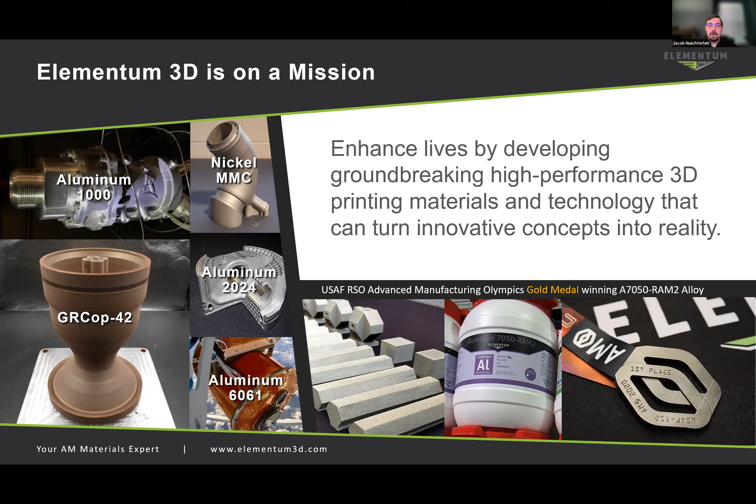Since then, we've released quite a few new materials, materials that people told us were not possible, everything from high strength aluminums to copper alloys, which we'll get to dive into today. We're located in Erie, Colorado, just north of Denver. We're actually going to be consolidating and moving to a new facility soon, so that's exciting as well. But yeah, just to set the stage, we have printers in-house, but our real business is supplying new materials and new print settings to be able to print materials better. Just so we're setting up the context here.

There's a number of different alloys that we've been printing, so we're not just printing copper alloys, but I really want to focus in on what makes copper difficult, why, and what makes copper different from some of the other materials. But certainly there are challenges in other materials that I think are completely different. So the solidification structure differences that are in aluminum alloys or nickel super alloys don't really occur in the copper alloys. And that would initially make you think, well, copper then is a good choice. But really it comes down to materials that are hard to weld typically are hard to print. And so making materials more weldable is a pretty important part of making them printable.

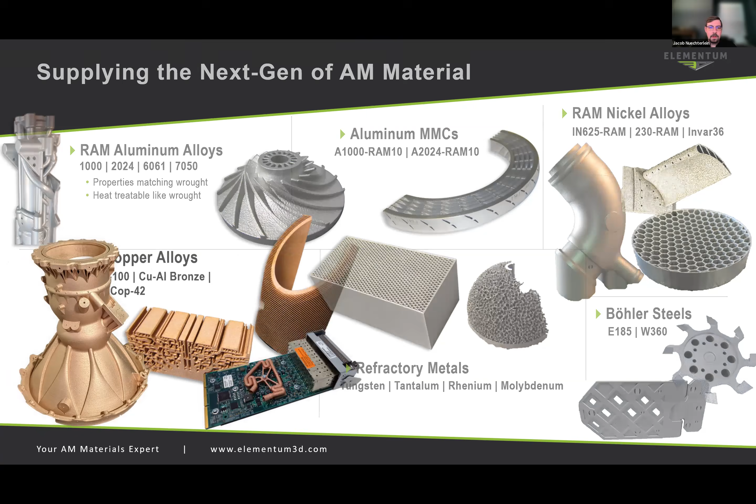So really moving to the copper alloys in particular, we started printing copper alloys in late 2015. And there's a lot of difficulties that come with that. There were a lot of questions. There were a lot of people that said it's not possible. But to start, there just wasn't any material available. The powder wasn't available. So finding the correct powder and being able to supply powder that would flow and spread in the systems properly was the first difficult task. And including some of these alloys like the copper aluminum bronze, we started with essentially mixing multiple different master alloys to be able to make that material when we were doing our first study on it.

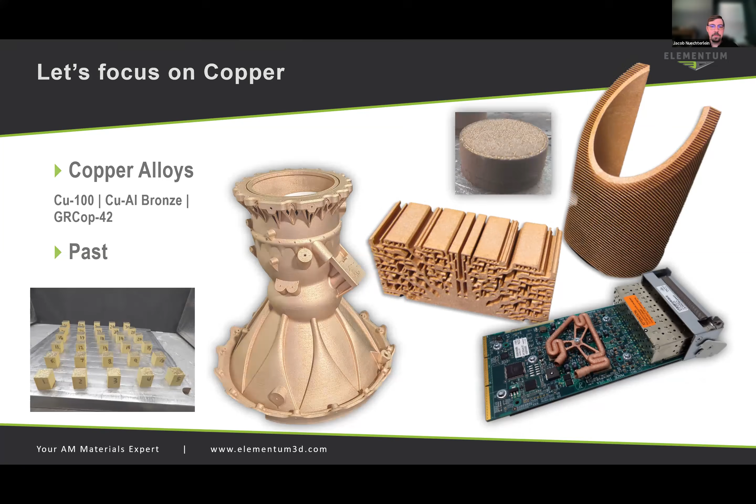And then from there, the conventional wisdom in the industry was, well, you can't print copper unless you have something like a green laser or something extra because of the reflectivity issues. So copper in general does not want to absorb laser power and laser energy. One of the advantages we found, though, was aluminum doesn't really either. Now, the advantage of aluminum is its lower melting temperature, but there's still that same problem of they both would like to reflect these particular wavelengths of energy. And therefore, the conventional wisdom was you had to go to green lasers to get this to work. That's really where we came in and said, well, hold on, that's not exactly true.

Because it's a powder, when the laser interacts with the material, even if it reflects, it has multiple chances to absorb because it can reflect off the individual particles of the copper, which then allows us to melt the material, but you have to move the laser very, very slowly. So then it was uneconomical.

So we ran into some issues right away with it being uneconomical to print, it leaving high porosity, and being able to get to like 94, 95% dense with a print. And that just wasn't far enough.

So that's when we really started diving into, as it says here, we found a process in which we could produce the copper material with a coating on the powder itself. So we could actually start printing pure copper material with that coating that enhanced the absorptivity. So all of a sudden we could get to very high densities.

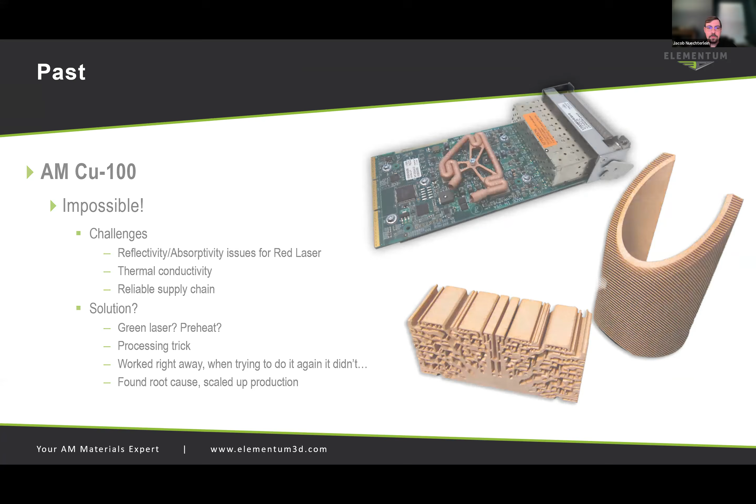Then we started getting into some conversations, and I think other presenters today will get further into this, but we really started printing with GRCop-42, which is a NASA-developed alloy, and started to look at that for high temperature applications. We started working on that primarily with how do we process it? What are the printer settings? How do you go about making this material and printing with it? Because of our experience in the copper 100 and in other copper alloys that we had begun working on.

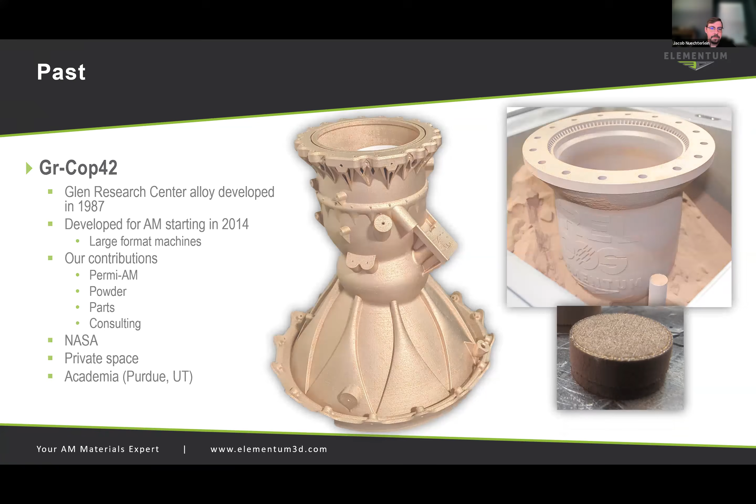But again, a lot of this work has been done for a long time now. As it says here, starting to print in 2014. So we started looking at, well, what are some of the things that are going to really limit the usefulness of being able to print these things? And there's some components within these rocket engines that we identified as places where you don't want to have to take two parts and bolt them together or weld them together. You'd like to be able to print it all as one piece.

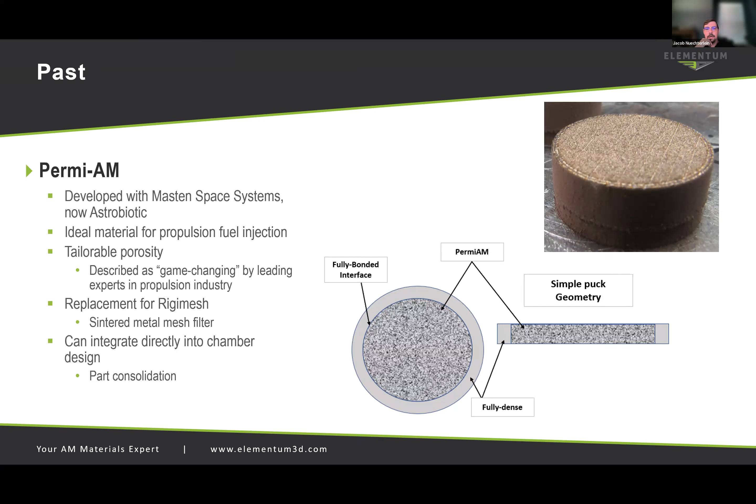And so one of those is a product that we began developing with Masten Space Systems called Permi-AM. This is essentially a process in which we can print it all as one piece, but have different functionality within the part. So we can have a single component all printed at the same time, but have a certain area that is intentionally porous in a particular way that helps us regulate flow of gases and fluids. And we've really gotten to dive into that more on recent projects as well.

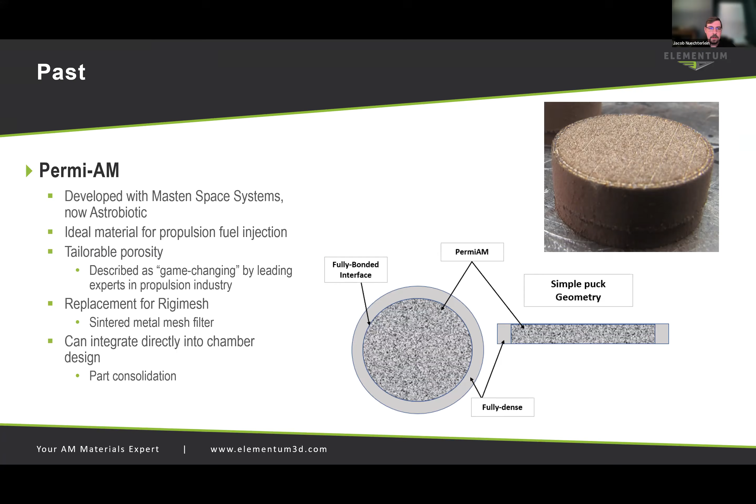Then there's other materials. So aluminum bronze is almost 90% copper, 10% aluminum. But the real advantage here is, well, we first started looking at it actually because of its color. It's used often in things like fake jewelry, that sort of thing. And so the color was actually something that we were first approached on by customers, where they were looking for something that had that kind of gold color to it.

But ultimately, the real applications for it end up being in high corrosion places. And so we've started to find a number of naval applications where we really got to dive into this. But like I said, one of the biggest challenges with this material was really being able to source that particular alloy, because you have to source the material from somewhere. And if it's the first time it's ever printed, finding someone who's going to do a custom run of a particular alloy is not something that's easy to do.

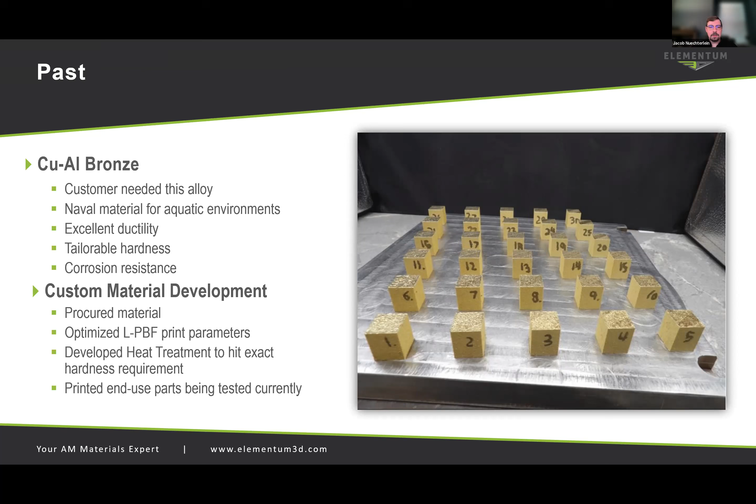As it grows and once it gets into production, that certainly becomes simpler and more straightforward. But I think that takes a while before a particular material is in full production and therefore is readily available and less expensive.

So now I'll move on a little bit more to the present. What's going on today? Where are we really going after different applications? We found a number of different, I think, exciting applications in the semiconductor world, from cooling to heat exchangers in data centers. But some of the things that I didn't realize were really going to be applications that are really starting to take off with our copper, now that copper is a more commonly printed material. We're starting to see RF antennas.

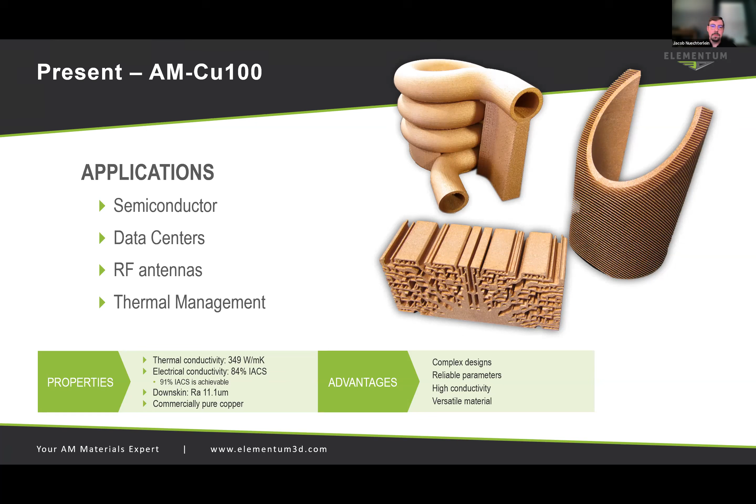And then certainly rocket propulsion. So we're working with different groups like the University of Texas. There have been competitions within student groups for looking at the next generation of rocket engines. Certainly, we've done some work with NASA and with other commercial partners as well in printing GR-COP 42 and other high temperature coppers, which we'll get into in a second here.

But I think there's a lot going on now where I think a majority of rocket engines will be printed in the future. And I think finding that sort of application within additive has really been the key to the growth of additive over even the last 2 years. Finding applications where it just makes more sense to print it than it does to make it through conventional methods. And I think that's really exciting to see, even accessibility to technology like this, down to the university level, where they can do things that just weren't possible even a couple of years ago.

So within GR-COP, there's a lot of optimization, and I think this goes for all the alloys that we work on. You can print just some simple cubes and say, well, done, it's good to go. That's very different than being able to make complex geometries, shapes, overhangs and thin walls, and being able to do that in multiple different systems. You hear, well, I've printed it in a smaller system like an M290, you should just be able to copy paste and put that into a larger system like an M400, even from the same manufacturer. And it's typically not that simple.

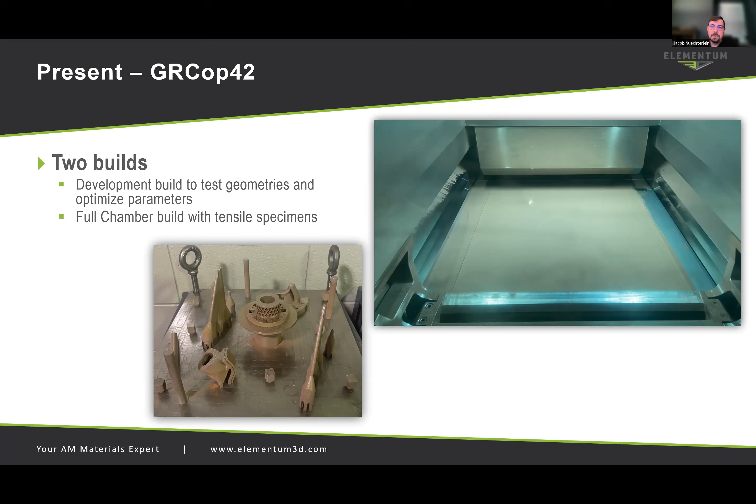So it has a couple of passes here of the laser. You can see you do not need a green laser. This is a standard off-the-shelf system. It can print copper, it can print GR-COP 42. And I think that's an important aspect. There may be advantages to a green laser or something along those lines, but there's also disadvantages, and those green lasers are typically harder to focus down to a very small spot size. And so you get these pluses and minuses within these different materials that I think are important to really dive into.

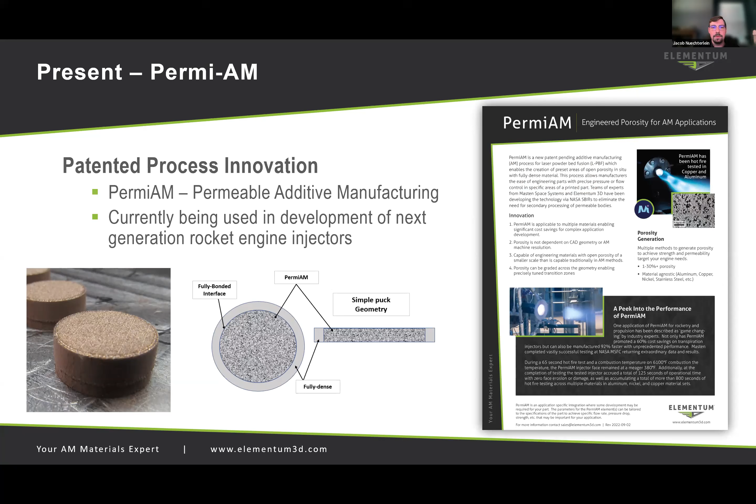I already talked a little bit about Permi-AM and that technology and the different designs, but we've gotten to dive into copper, nickel alloys, all sorts of things for these pretty complex geometries. But I'm actually excited for the future of Permi-AM and where it can go, because it's not just in propulsion, but we're starting to see other industry applications in oil and gas, even combustion engines, where there can be big advantages to something that can control or moderate the flow of gases or fluids.

So there's a couple of things where we can see cost savings of not having to attach two pieces together. We can get turnaround times on prints much faster, and we can do things like swirl the fluid or have the fluid exit at certain speeds or have different pressures applied. So there's some really interesting application space that we're investigating today that hopefully we'll be applying to really interesting applications in the next 3 to 5 years.

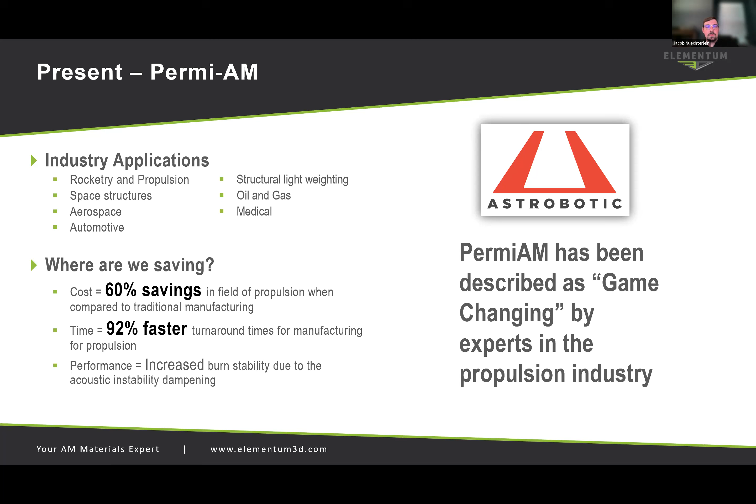What we're doing with GRCOP 42 today, I don't want to go too far into it because there's going to be other people that really get into this, but I want to talk about some of the issues with GRCOP 42, which tend to be in the atomization, supply chain and the cost of that material. It's very difficult to make GRCOP 42. It contains chromium niobium compounds, which have a much higher melting temperature than the copper itself. So you have to go to a very high superheat in the copper, a temperature well above the melting temperature of copper, to melt those precipitates and get a good distribution of those elements so that when you atomize, you have a nice consistent powder. Well, the problem with that is then you start to dissolve the crucible.

And so as you're at these very high superheat temperatures to dissolve those chromium compounds, you end up with that kind of race. Do you dissolve your crucible faster and therefore have contamination from the crucible, or even bigger problems, before you're able to atomize all of the material, which then limits the size that you can do at one time. And there's a lot of great companies doing atomization of these materials, dialing in, getting better, and finding new crucible materials and different ways of doing it. But it is still limited, and the volume of powder that's possible to produce is really limited by technical concerns, not just the commercial concerns of making GRCOP 42.

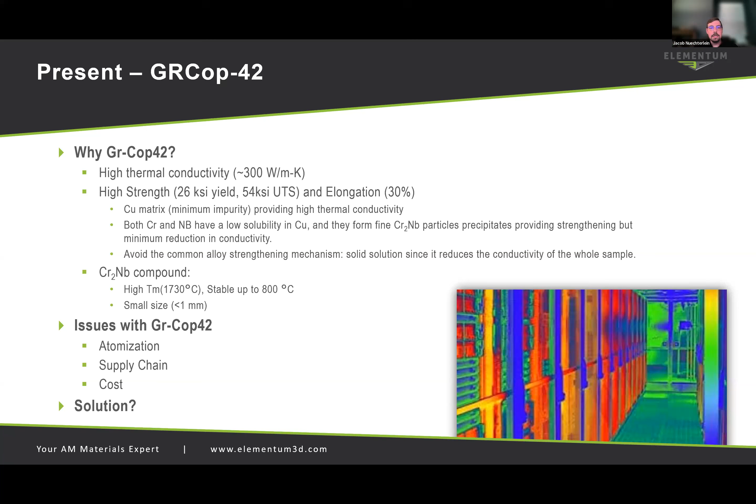And so there's then the supply chain and cost problems that go with that. Two years ago, we bought the majority of the volume that was available to the rest of the industry. As a small company like Elementum, that's a problem. And so we identified that as an issue. GRCOP 42 performs quite well, there's great performance out of that material, but if you can't find it for other application spaces because it's too expensive and hard to come by, and therefore you have to accept lower quality product in some cases, or product outside of a very defined specification because that's all that's available, that causes issues. So what's the solution?

This is really what I want to talk about, the future. I know there's a lot of different people looking at solutions to this, either atomizing GRCOP faster and better and in larger quantities, but also looking at alloys that are similar to GRCOP 42. That's really something that we're working on. It's not released yet. But at the moment, we have some really interesting results with what we're calling our hot copper, a high temperature copper meant to perform as well or better than GRCOP 42 in conductivity and high temperature mechanical performance, but be way easier to produce in large quantities, therefore easier to source and available for applications other than just rocket engines.

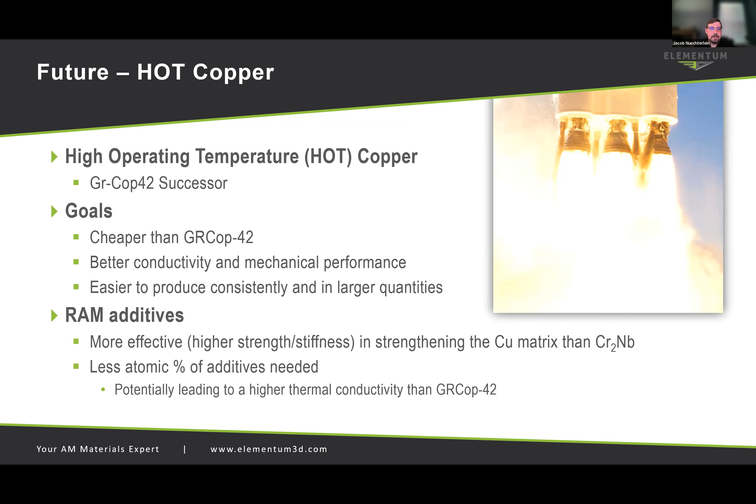The way that we're doing this is through our particular technology called reactive additive manufacturing, which I won't really discuss today. But if you want to know more about what we're doing and where we're going with our hot copper, happy to dive further into the science of what makes this different.

The future of Permi: there's a number of different alloys that we've been applying it to, not just the GRCop-42, but I think there's also different things where we're going to start looking at the flow patterns and how the fluid or the gas is flowing through these pores, and therefore how it comes out on the other end, and then controlling that to do things that just weren't possible without 3D printing. So not only taking advantage of the pressure drop, but taking advantage of some of the other advantages to this kind of intentional porosity that we're printing in.

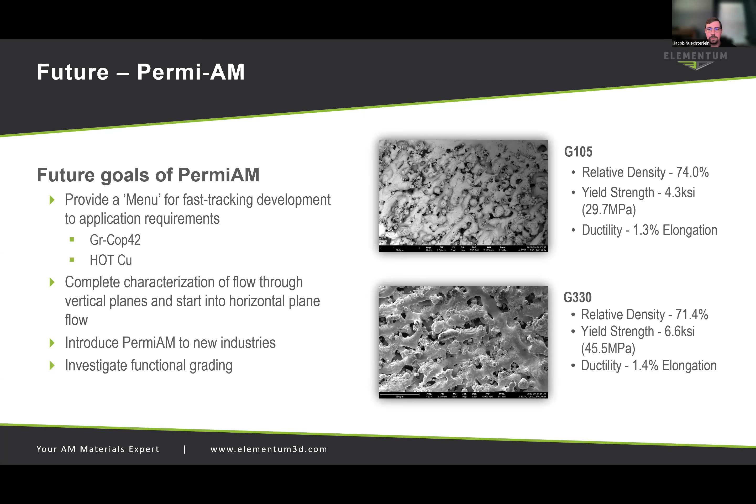And then we recently were awarded an SBIR to go after copper nickel alloys. We've been looking at this over the past year, really looking at copper nickel alloys for RF components and for other components within the naval space, which I think there's some interesting reasons for going after some of these copper alloys that just weren't really achievable in the past.

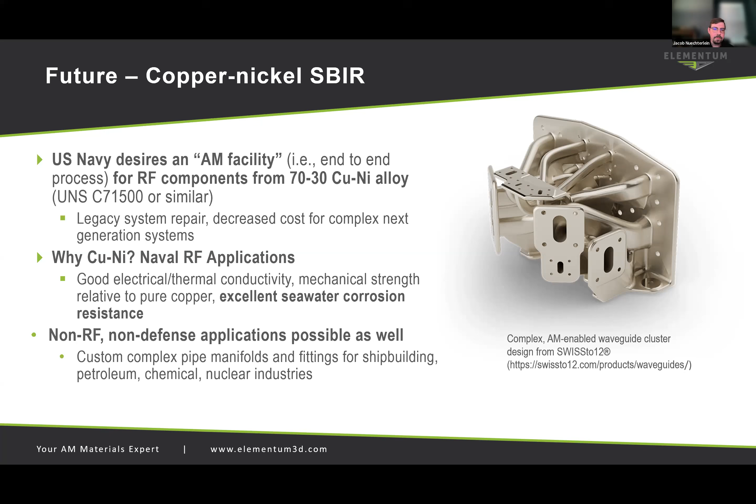So like I say, there's a number of things that we're working on in the copper space. There's a number of other alloys that we're looking at, maybe in the future, of very high thermal conductivity coppers. So going to copper alloys that have higher thermal conductivity than the wrought material, and then looking at how that affects the landscape and the applicability of additive for a number of applications that were just kind of locked out in the past.

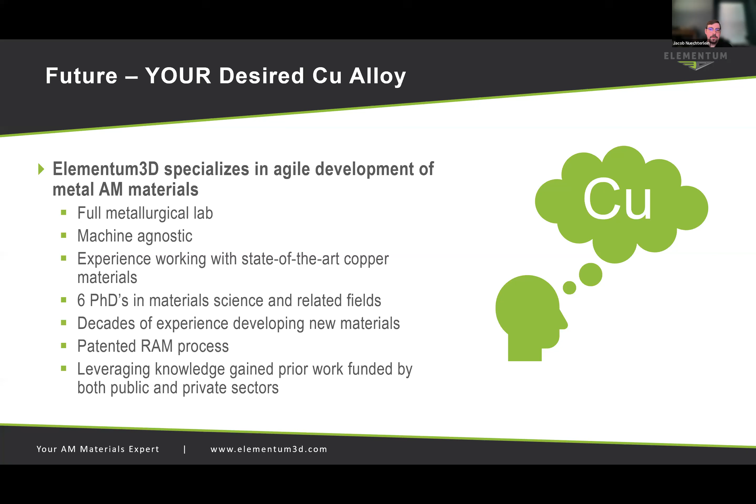So at Elementum, that's really what we focus on: developing new materials, developing new alloys, and copper has been one of the things that we've been leaders in for a long time now. So that's us. That's what we do. Happy to maybe have a look at the Q&A and dive in.

Hey, so yeah, awesome presentation, Jacob. This is a great collection of speakers because we're all going to probably take a slightly different angle on the subject. And my angle is definitely going to be trying to raise awareness of the vast amount of applications and what we're doing at 3D Systems. We have numerous different copper alloys, and I wanted to show you a sizzle reel of really great applications we've been working on. So let's go ahead and kick it off.

I'm Scott Green from 3D Systems, principal solution leader here. If you're not aware of 3D Systems, we're a global company. Most of our metal printing and R&D in metal is happening between Littleton, Colorado, Riom, France, and Leuven, Belgium. But we have offices all over focused on R&D of some sort, both plastics and metals. This is how we're organized. We're basically broken in half: on one side is healthcare, and on the other side is industrial solutions, half by revenue, and I manage a bunch of different segments, including semiconductor, part of energy, and academic and research.

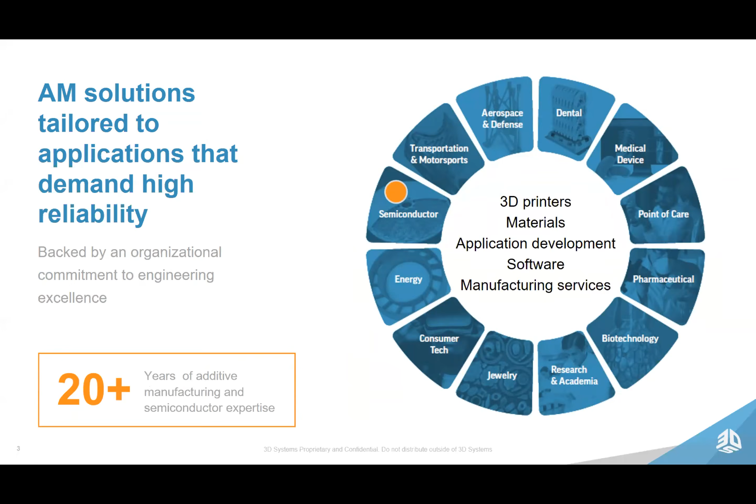Generally, how we work is we take a kind of holistic approach to working with our customer and bring solutions together with innovation and expertise. I think there's actually a really good way to capture this, which is what we call our tech transfer process. For any application we usually go through this 5 or 6 stage process where we take a look at your challenge, we try to figure out the right solution for it. And we go through an innovation process, a development process where we help do design for additive manufacturing.

We do industrial design and design for manufacturing in general, which can include lightweighting, advanced cooling design. We've got a huge amount of expertise in cooling design, thermal design. And then once we go through that innovation process, we're going to go through the process of figuring out how you are actually going to make this thing. And we find the right machine, material, build styles, any downstream post processors through our network, anybody who needs to do surface treatment or machining.

We start to build this package of knowledge on how to make something. And that is very valuable because we're de-risking the entire process of using additive. And that's pretty key to scaling additive in industry. It's still kind of new for a lot of people. It is scaling really quickly in industry in general, but a lot of companies are kind of dipping their toe in, but there's still risk.

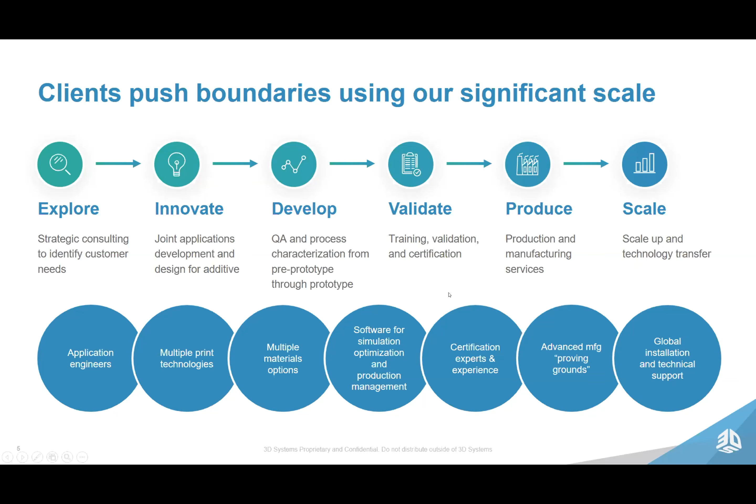Just a little bit about us again. We work in highly regulated environments. Half of our revenue comes from healthcare, medical device production, and healthcare in general. So we've got now almost 200 machines running nonstop, 24/7, 365 internationally. And we specialize, I like to say, in torque as opposed to speed. We run a little bit of everything that we have, and we try to be experienced in all the different processes of post-processing and finishing and all of our different materials so that we can be most agile to help customer needs.

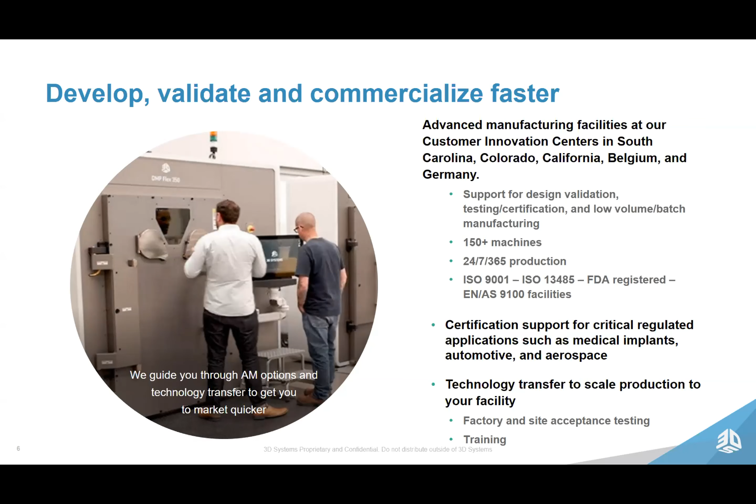All right, so let's talk about copper, what we're here to talk about today. Now, generally, I just took a sampling of the past few years. As a machine maker, 3D Systems, a machine designer and vendor, and a user of our own machines, we're always getting the biggest breadth of requests from people. Okay, do you use niobium? Do you print unobtainium? Right, all these different things.

And we've always gotten some requests for copper, but I will say that it's definitely rapidly increased in the last few years. It was kind of quiet for a while, a couple requests every quarter here and there, but it's actually rapidly increased. So there's definitely an acceleration in not only the implementation of additive in industry, but also copper applications in industry, and that's enabled by folks like Jacob and 3D Systems and other material manufacturers or vendors that are configuring copper to make it easier in the process and finding novel alloys which are bringing the most valuable parts of the element together with other very valuable properties to bring a valuable part to market.

So here you can see some basic industry ranges. Okay, we've seen it all across the board. Space access, space payload, marine, defense, semicon, of course. Very infrequently, you're going to find copper in semiconductor capital equipment, but more frequently, you're going to find it in general thermal applications not related to semicon process. Definitely general aero, auto, and consumer electronics.

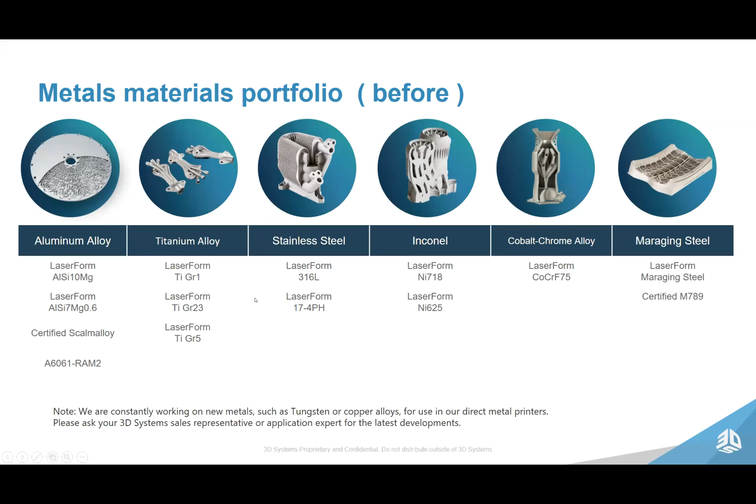Now, this is what our metals portfolio was before we started to really focus on copper. So, we use 6061 from Jacob and Elementum 3D. It's great. But then again, we also have all these other materials available. So what we did is, in 3D Systems style, we laser focused on the concept and just crushed it. We went across the board and figured out, okay, out of all possible alloys that are being requested, which ones are critical, and each one of these has different values and different reasons for being developed, and most are at very high TRL levels at this point.

So here you can see we've got, I believe we're at 99.8% pure copper, copper nickel 30. This was developed with the United States government for marine applications through Newport News Shipyard. It's something we announced about a year and a half ago and finally released at IMTS. So we're printing and firing on copper nickel 30 today. Copper chromium 2.4, copper chromium zirconium, both very similar alloys, which share parameters, and GRCop-42.

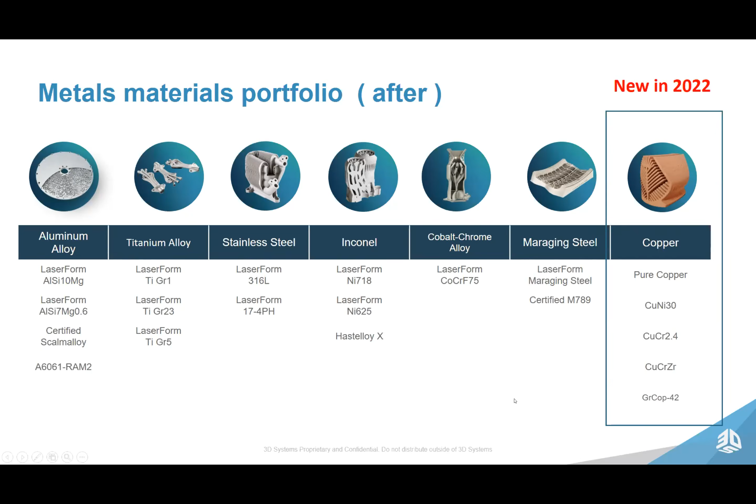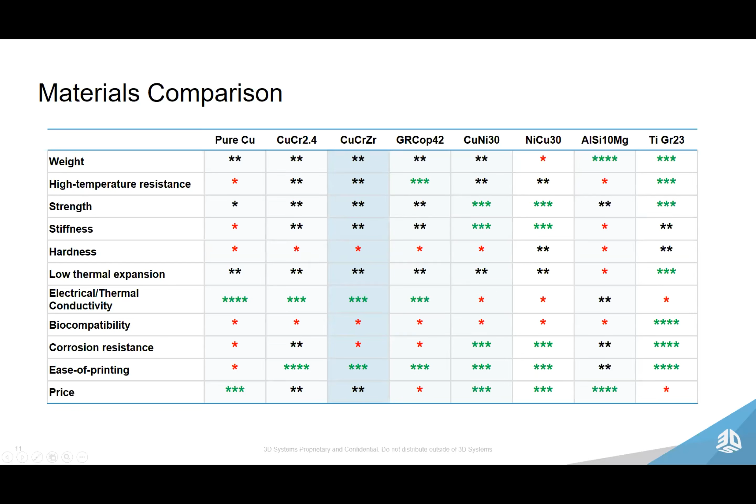All right, now these alloys are printable on our mid-frame system, not yet available on our large frame system, DMP Flex 350 and Factory 350. Pure copper is in fact using a different optical configuration, and there's a good reason for that. As Jacob mentioned, there are ways to print it with a standard optical configuration, and we did prove that too. But in order to really get the productivity and speed for production applications that our customers are demanding, we did go with a different optical config, and that actually benefits us in the end result.

Yeah, so if you're not familiar, DMP 350 and Factory 350 today are at 275 by 275 by 420 in height. And we pull a vacuum and then backfill with argon. So operating in almost a zero oxygen environment is great for oxidization and protecting and maintaining the quality of the material. It also allows us to achieve extremely good IACS results through our optical strategy as well as our chamber.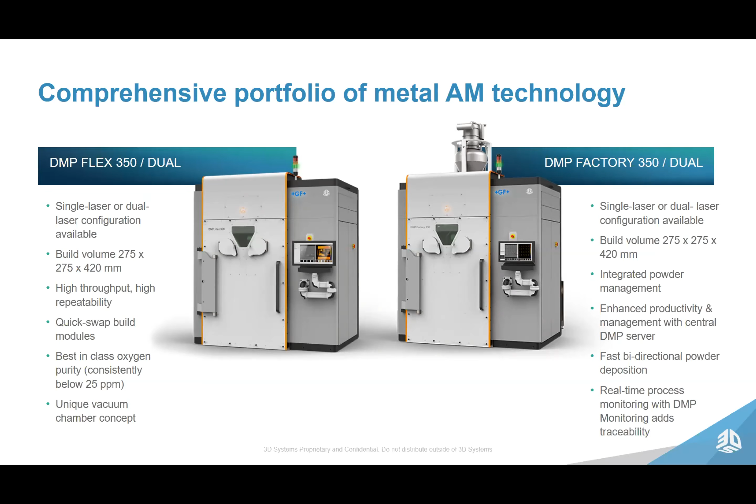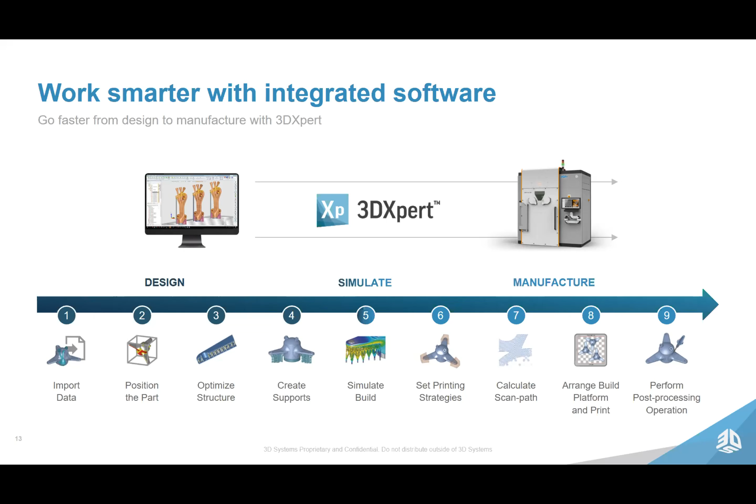All of this is driven by our 3DXpert software, which is an all-in-one solution for additive manufacturing. It allows us to design supports in any way you'd like, but we offer styles for the materials that we support. So it's pretty simple and easy. Also, you can engineer your own type of porosity on the surface or interior with the functional representation and implicit modeling. So it's a truly hybrid modeling software, which allows you to bring any geometry together into a single package for printing. So any part could actually include lattice, mesh, implicit, and B-rep CAD, and supports all at once. Let's look at some application examples.

Yeah, so commercially pure copper, we're absolutely seeing things like cooling tubes, and in this case, we printed on the Flex 200 fine spot configuration, 50 micron layer thickness. Yeah, and this is commercially pure copper. This was shown at IMTS, and we'll be showing again at Formnext. And it's a little cross section through a cooling tube with a heat sink inside.

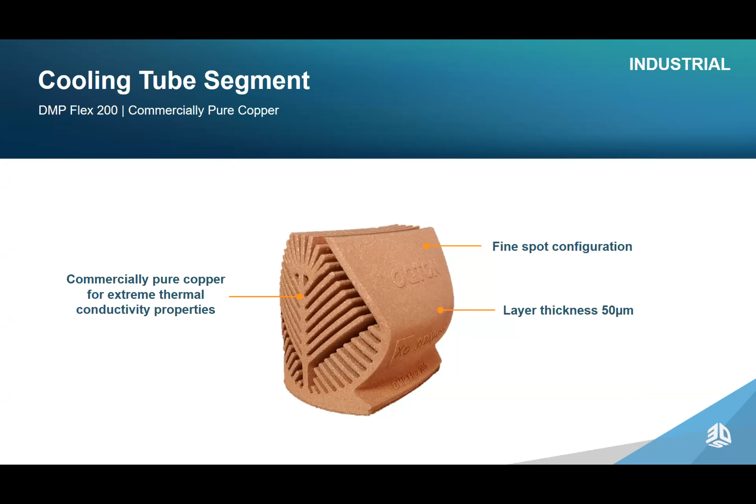And one other thing is we do offer a smaller volume. I'd say that our Flex 350 and our Factory 350 are our bread and butter mid-frame systems. We also offer the DMP Flex 200, which is a slightly smaller system with a really fine spot size. So we're able to not only cover the high-speed production copper applications where general layer thicknesses satisfy the need, but also we worked very hard to do super thin wall thickness, 150 micron and lower wall thickness. But that's only available on our Flex 200 because of the special optical configuration, right?

It's got a smaller spot size. We use a compressive roller, and we can do thinner layers with thinner, smaller powder. So we're really able to cover the different kinds of applications and needs, fine features, high precision, and in one range, a mass amount of different materials available in our mid-frame workhorse.

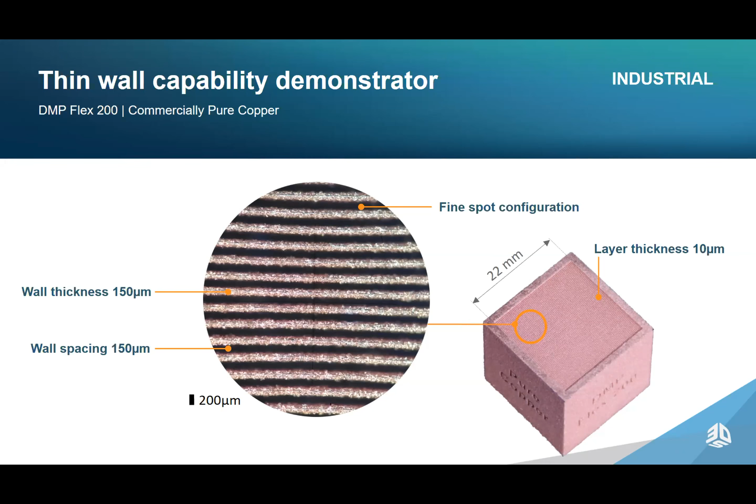That's one issue that you're going to see in the market: many other companies in the industry are going to say, yeah, you can get up to 100% IACS with heat treating, because one of the tricks that you'll see is, yeah, you can print copper, but it's porous as heck. So you have to go through a heat treat to kind of shrink it down and basically melt it together and solidify it. And that could be okay for your application.

That's not the way we work with 3D Systems. You get parts that are almost completely dense coming out of the printer with 100% IACS, up to 103% IACS we've seen. So no heat treat is required. With heat treat, you just gain marginal advantage on IACS and density. So heat treat on commercially pure copper is not a requirement to get your full density.

It's not like a binder jet powder part where you have to go through a heat treat or a sinter to get to full density. And that's what some LPBF processes do require you to do, is go through that heat treat to achieve final density. So luckily, we figured out a way to do this without that.

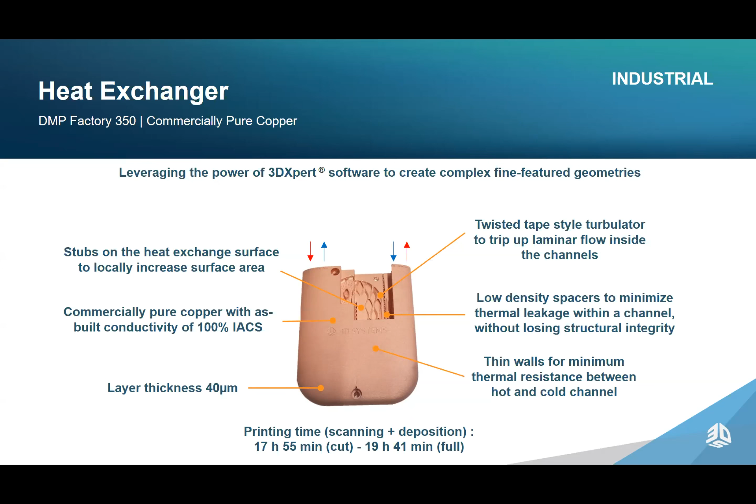Here's a heat sink we actually show quite a bit. We printed it in copper, and you can see fine features, and again, stable conductivity after heat treat at 102% on this guy. And typically we're again about 100% IACS as built.

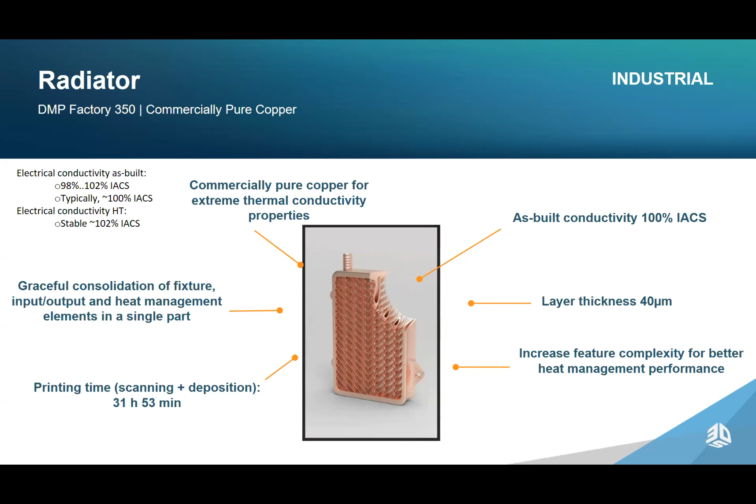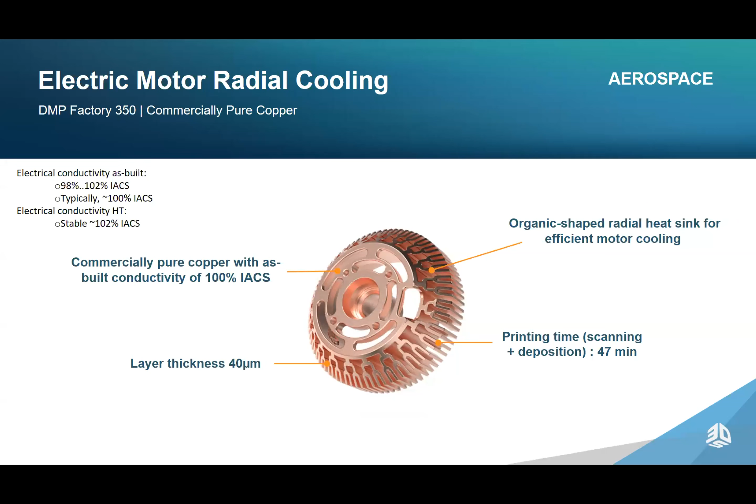And aerospace, here's a good example of an electric motor radial cooling ring. A lot of different applications across many of the industries. Again, these are all based on real customer use cases. I'll give you some time to take a look at these. Electric motor winding, this is a very popular one. So if you're in the inductance space, this is another great example for you guys.

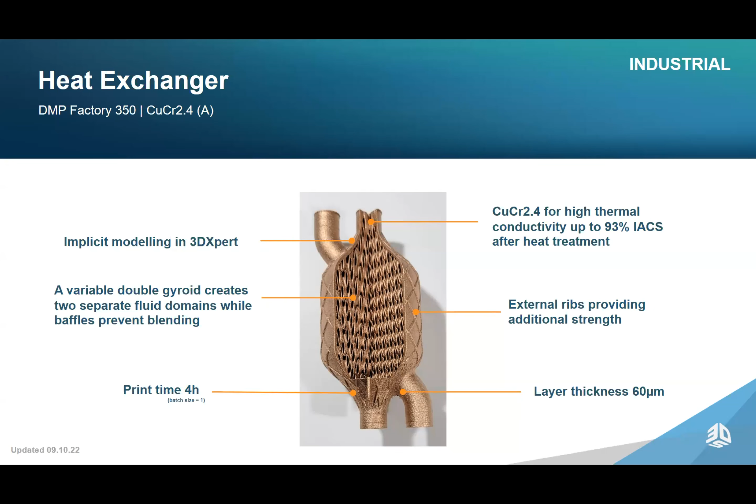And heat sinks, of course, heat exchanger is always a popular topic. Going to be a good application for copper chromium 2.4, copper chromium zirconium. Something a little bit more stable than just pure copper, which is pretty ductile. This was implicit modeled in 3DXpert. For this specific guy, we're up to 93% IACS. Again, it's geometry dependent. And this is printed in 4 hours.

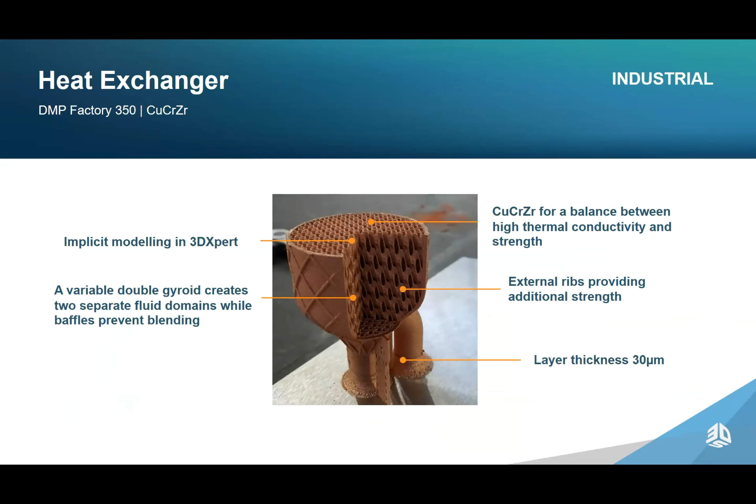I'm going to slide through a couple more of these. Heat sinks. There's a CuCrZr, copper chromium zirconium heat sink. And of course, we have to show a GRCop-42 and 718 combo. In this case, we are able to start and print on top of a flat surface. So if we do print this propulsion component, we're able to actually re-index on top of it and continue printing, or it could be assembly. And this is a test we did of cladding and printing with a multi-material on top of it.

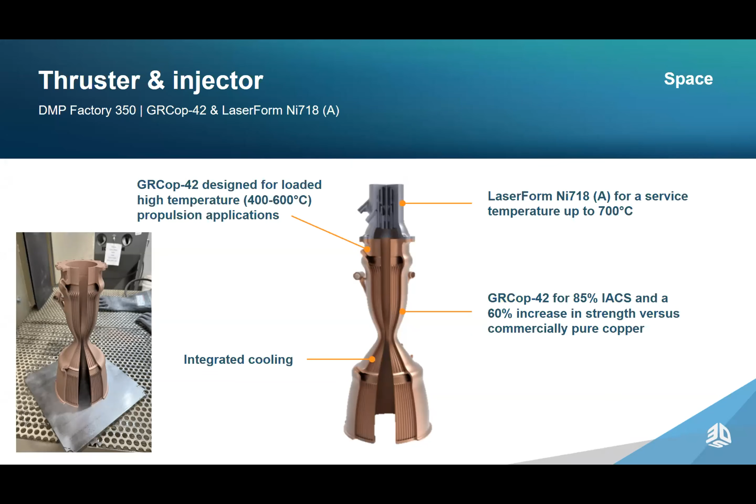So if you would like to know a little bit more information, I'm right on time. You can come to Formnext, and if you're not mobile enough to get to Germany, that's fine. You'll see our reports from Formnext. You'll see our parts live. We are launching a lot of these copper alloys live. Typically, we will start to launch stuff even at mid and higher TRL levels, and then if you come engage with us, we'll finish developing for your specific application. So we'll be talking about at least 5 different copper alloys that we can support at TRL level 5, 6, and 7, and up to 9. So very ready to start printing for customers.

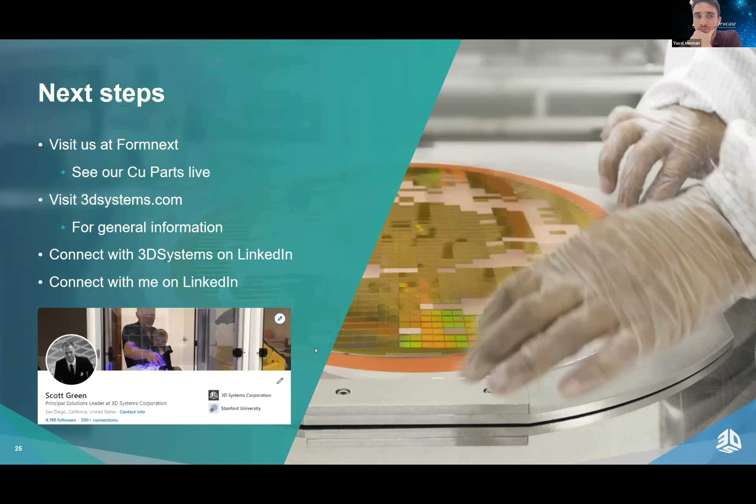It does not look like I can. Are you able to? Oh, here you go. Now, got it. Okay, I got you. So give me 1 sec. I'll just pull it up. Sure, quite all right. Okay. Perfect. I can see it.

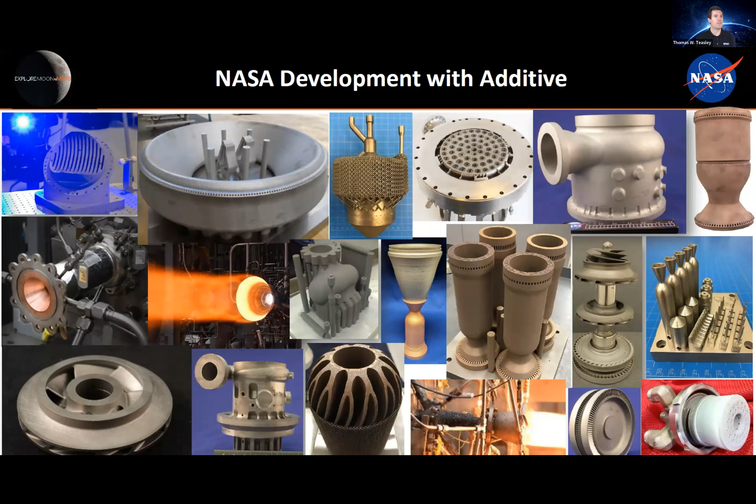You can see several examples of GRCop-42 and GRCop-84 combustion chambers shown here, but more recently we've been working more towards development of GRCop injectors and GRCop nozzles, though there are other materials that may be more practical for nozzles given their low heat flux environments. But for chambers, GRCop seems to be a clear winner here.

And if we go to the next slide, you can actually see several examples of hot fire GRCop alloy chambers, some of which have been also mated with GRCop alloy injectors. And these engines, we have tested them very thoroughly in a range of combustion environments, including with different propellants such as liquid oxygen kerosene, or RP-1, liquid oxygen hydrogen, and also with methane, several of which have been subjected to the most extreme combustion environments that you can imagine.

In many cases with GRCop alloys, I have been unable to find specific conditions in which you can actually burn through the wall if your coolant channel geometry is designed correctly. And that is another application that we're continually developing, because you no longer have to be limited by traditional manufacturing techniques for coolant channel geometry. You can design a specific geometry to a specific heat flux profile and really reap the benefits of the additive manufacturing process and push the hardware to its limits in terms of combustion.

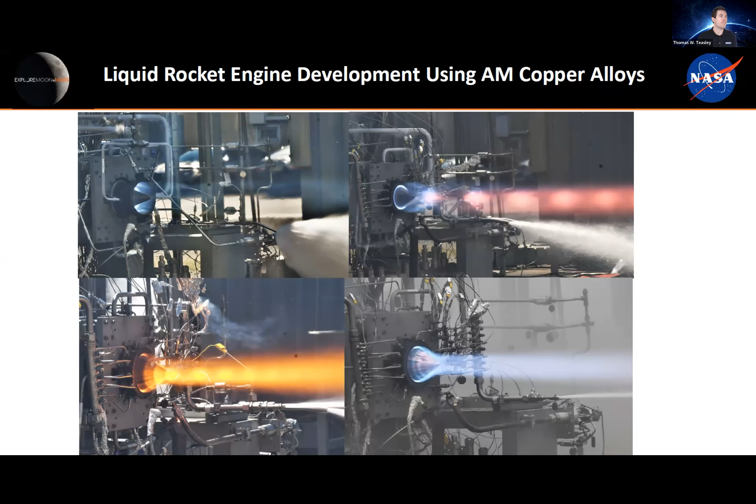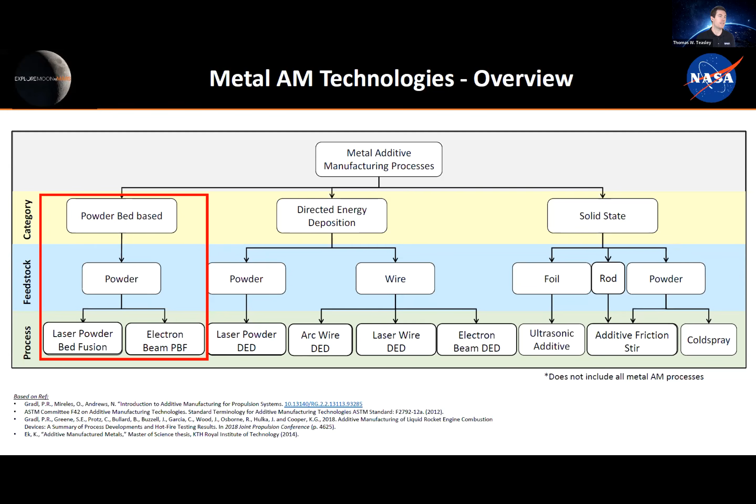And so right now on our development pathway, a lot of the work that I've been doing has been mainly focused on powder bed fusion based manufacturing processes using powder in a laser powder bed fusion format, some of which in an electron beam powder bed fusion format. But now we're trying to push more towards using directed energy deposition with either powder or wire feedstock in multiple different processes, or even solid state using foil, rod, or powder, also in multiple different processes. Next slide, please.

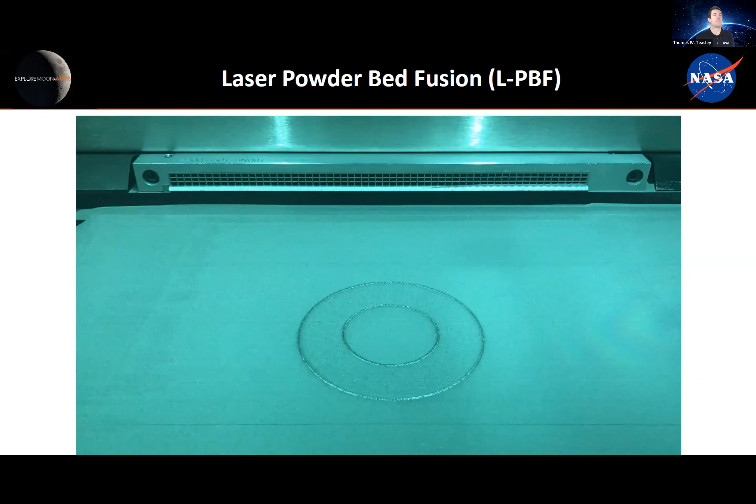So with combustion chambers and combustion devices in specific, the additive manufacturing process is a very valuable tool in reducing the duration of a schedule and cost, particularly for a combustion chamber. But I don't want to give the impression that there needs to be a switch from traditional manufacturing techniques to additive, particularly for this application, mainly because it is just an additional tool in your toolbox.

If there's another type of component or process that makes more sense for a given application, then it's up to the designer to determine what is the most useful for getting the best cost and the best schedule for that component. In the case of a combustion chamber, it does actually make a lot more sense to go the way of additive manufacturing, particularly for making use of such a resilient copper alloy like GRCop-42 or GRCop-84. I have had a very difficult time finding it in the wrought form, or at least if I was able to, it's extremely expensive compared to just going with an additive vendor.

But just to walk through this process, instead of having to go through finding a liner, casting, and then forming that liner to a specific contour, slotting it via a machining method, and then doing the exact same concurrent development steps for the closeout. That's multiple processes, multiple months of shipping components around the country, if not the world, to get an end product that is several hundreds of thousands of dollars.

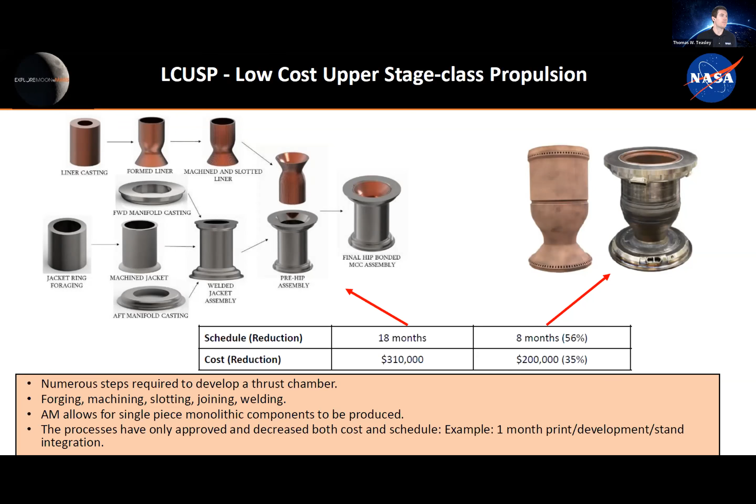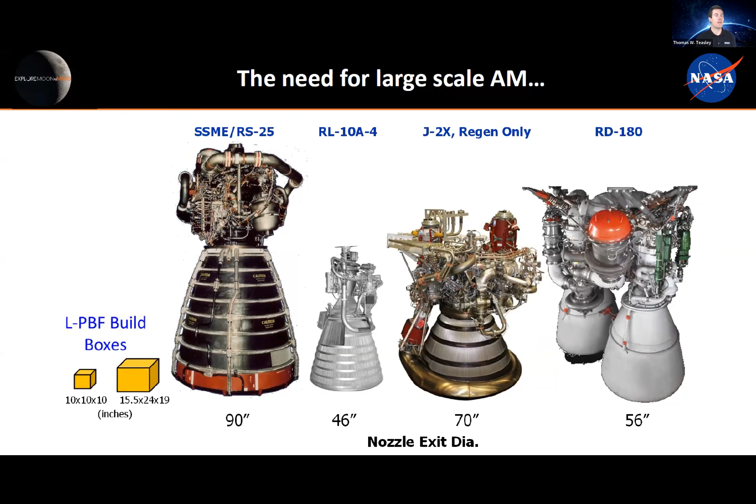That's where new processes like laser powder directed energy deposition, or maybe even sticking with a traditional manufacturing process, might make more sense. Next slide. And then also, yes, this talk is on the use of copper alloys and specifically GRCop, but again, for your specific application, you need to consult what materials make most sense for you. For combustion chambers, it does make a lot of sense to use a copper alloy for the high conductance and high strength in the case of GRCop.

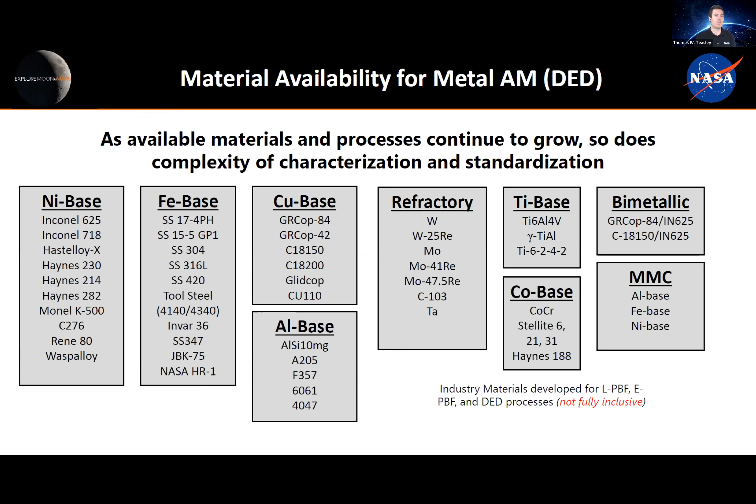However, for nozzles, since the heat flux environment is much lower than the chamber, you may be able to get away with a higher strength, lower weight material, such as maybe an aluminum or maybe a superalloy of some kind. So there's no requirement that you use a copper-based alloy for a high conductance environment. You, as the designer, would just need to make that trade in your preliminary design analysis. Next slide.

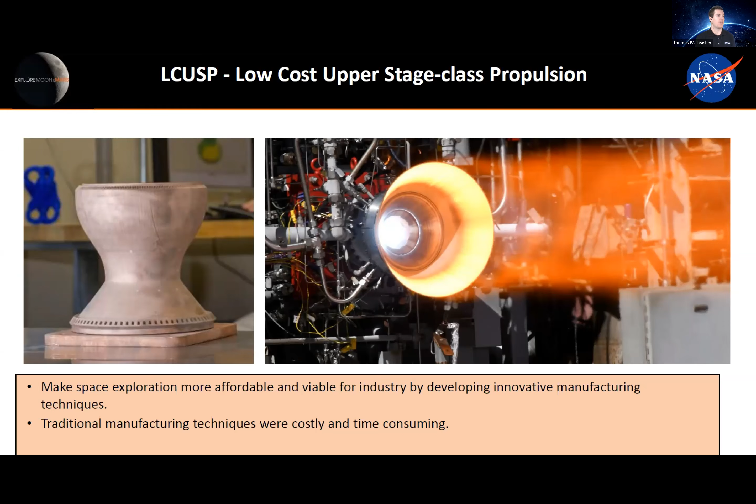And if you go to the next slide, you can see a lot more examples where we've been very successful with integrating channel wall solutions, multiple different closeout configurations to explore lower weight geometries, and really combine as many processes as possible to reduce schedule, reduce cost, and even a couple of examples here of bimetallic solutions that make more sense for a given application.

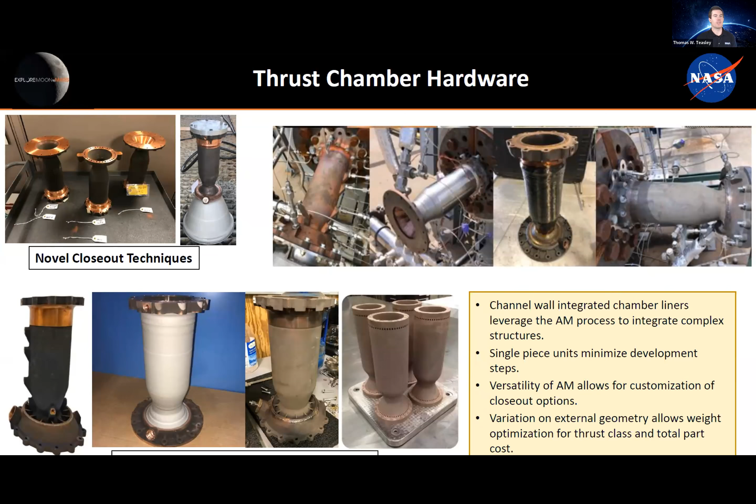There are also cost reduction strategies by including multiple pieces of hardware or chambers on a single build plate, like the example in the bottom, but that might not make a lot of sense for much larger combustion chambers. Like I mentioned earlier, you may only be able to produce one part per build plate given your build plate size. Next slide, please. Now let's talk a little bit on customization, and next slide one more time. There is a lot of customizability when it comes to additive, and in particular with copper alloys.

The roughness factor of the part really is advantageous, especially from a liquid rocket engine standpoint. And if I can backtrack here for a moment, this chamber in specific, we actually hot fire tested it yesterday and demonstrated its success, but it only took us a month to produce and manufacture it from design completion to having it on the stand, which is absolutely remarkable.

Maybe 5 to 10 years ago, if I would have talked to one of my colleagues about producing a chamber in the span of a month, they would have just laughed at that notion. So really the technology has made leaps and bounds in an extremely short period of time. And I for one am very excited to see what is possible in the coming decade, especially with new copper alloys coming to the horizon.

Now, with customization, there is the ability to produce a part and in post-processing, change the part's roughness on critical interfaces. So in coolant channels, for example, it may be more desirable to have very low roughness so that you can reduce your pressure losses as much as possible. In the hot wall side, you can now customize it to be rougher or smoother depending on your heat load requirements for the engine. And that also gives the customizability of downstream components.

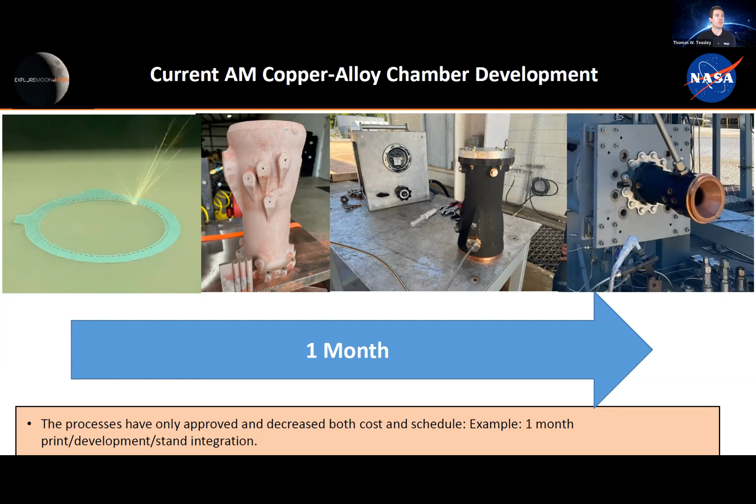So now not only are we able to integrate those instrumentation ports, we can obtain a lot more data from a single hot fire test. If you'd asked an engineer maybe 10 years ago, we would be lucky to get maybe one pressure, 1 or 2 temperature measurements in an injector manifold. Now we can take multiple and see exactly how maldistribution is occurring and get a much clearer picture of how conditions in manifolds are impacting downstream properties like combustion performance or global engine ISP. And so now we can customize the global engine performance based off of direct measurements in additively manufactured hardware.

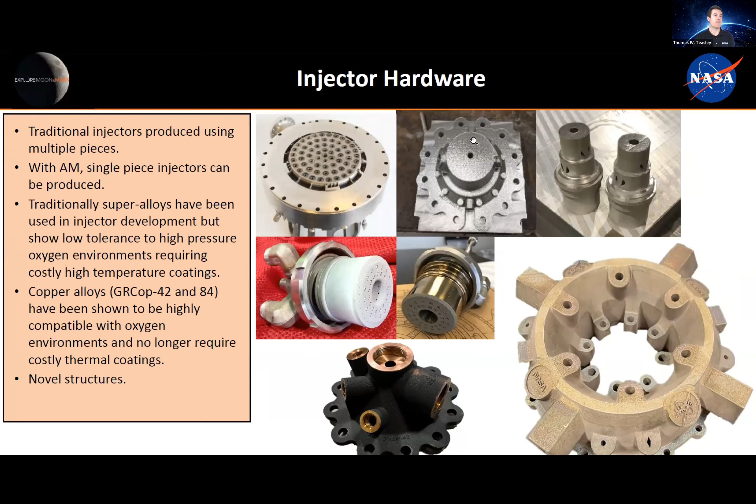And one more advantage to copper alloys and GR-Cop in specific is its ease of machining. If you talk to any machinist who's ever machined a copper alloy compared to a super alloy, they are much happier. You go through tooling at a much lower rate, and so it decreases component or consumable costs as well. So you don't have to pay for greater machining costs because of the ease of machining. Next slide.

And then this just gives another good example of post-processing. So with post-processing customization, you don't necessarily have to integrate your best performance capturing techniques, design strategies or technologies within the design phase or even in the print process itself. You can now integrate polishing techniques for the coolant channels or polishing techniques for the closeout of the material to increase fatigue life or increase the ability of the hardware to give you a higher pressure budget in your engine system. So this is just one more customizability of AM hardware that you can see here. Next slide.

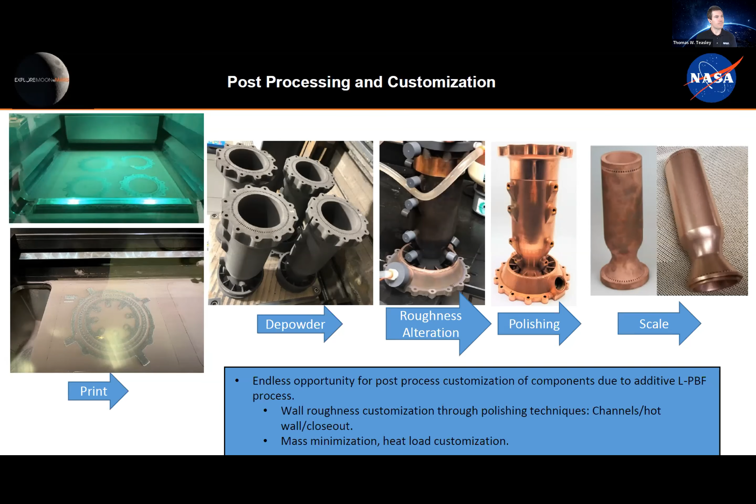And to summarize all this work, yes, there have been enormous strides in additive manufacturing, particularly with copper alloys, GRCop, and specific for our given application. But really the future of the technology is increasing in scale, increasing in design strategies, reducing material costs, rather decreasing the amount of time it takes to produce a component, and then also combining different methodologies for processing,

all with the goal of decreasing costs, decreasing the schedule of a component, and really one of NASA's main goals is making space access much easier for industry and academia and government, and at much lower costs. Because at the end of the day, we very much want a thriving space economy, and additive manufacturing, and in particular copper alloys, have really helped to enable that going forward.

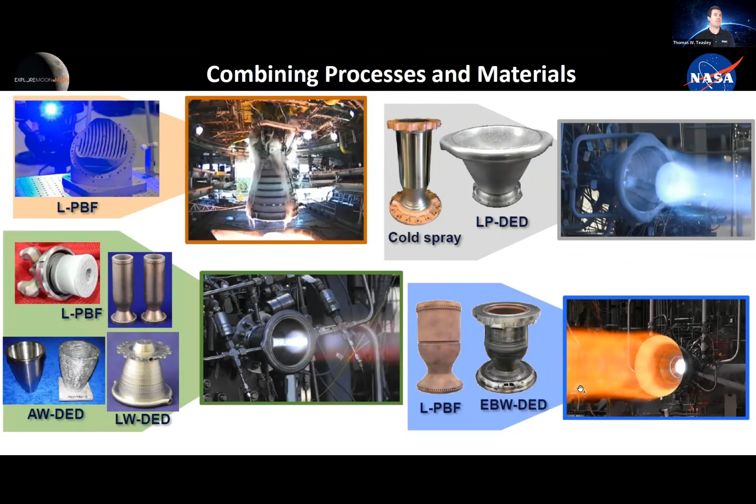Thank you so much, Thomas. We definitely have a couple questions here, and there might be more coming in as time goes by. The first one I see here is for Thomas. Can you comment on the inspection requirements, CT, etc., of AM versus conventional thrusters? I've heard that powder trapping in cooling channels for AM thrusters is a major concern.

Yes, so it definitely is a major concern, and a lot of my work over the last year or two has actually been on how we can integrate new design strategies so that powder removal is not such a large concern. Injectors in particular, if you have a long, skinny orifice, it has a higher propensity to trap powder, and the exact same thing applies for integrated coolant channels. So it has been difficult, but luckily vendors have been getting a lot better about integrating new techniques to get that powder out right after the part has exited the build plate.

And then we on the NASA side have also been developing new strategies to design channels so that they're not nearly as restrictive, and you can maximize the minimum flow area pass, so you have a better chance at removing powder. And then on top of that, you mentioned CT scanning. A lot of my work is development hardware. So I can't quite speak to requirements in terms of flight engines, though I would say it is likely that some form of CT scanning confirmation of powder removal is definitely a requirement there.